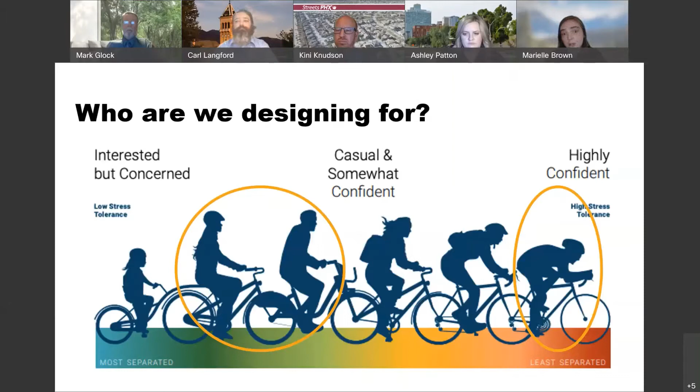To discuss the safety and traffic impacts, I'm going to hand it over to Carl Langford, my colleague.

Thank you, Marielle. One of the things we always look at when we have a 4-lane roadway is the safety aspects. Research shows you can receive a 47% reduction in collisions when you transition a 4-lane roadway—2 lanes one direction, 2 lanes the other—to a 1-1-1 roadway, meaning a center turn lane with single lanes going north and south. Also, one of the benefits from the safety aspects is a reduction in speeding, since the prudent driver often sets the speed for people along the roadway.

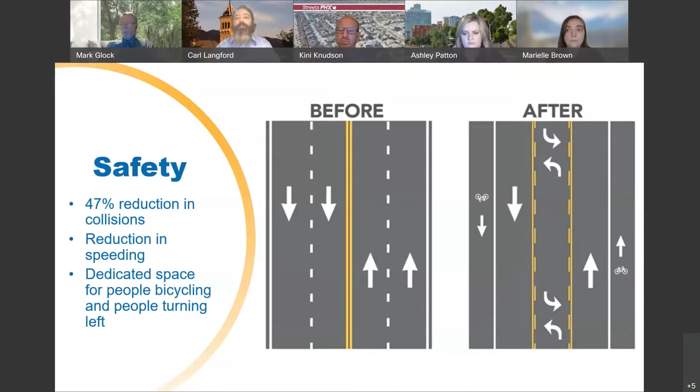So, as the prudent driver often sets that speed for people along the roadway, it also provides dedicated space for people bicycling and for people turning left in the area.

As we talk about safety, I want to talk about 3 specific types of crashes that happen on 4-lane roadways that improve as we transition to a 3-lane roadway. The first one is a rear end collision.

The car in front of you needs to turn left. They put on their blinker. Hopefully you're paying attention and have sight distance to slow down and stop, but oftentimes people aren't, and they rear end the person in front of them. As you transition to a 1-1-1 configuration, that vehicle turning left gets to move into a left turn lane, and traffic can continue past unimpeded.

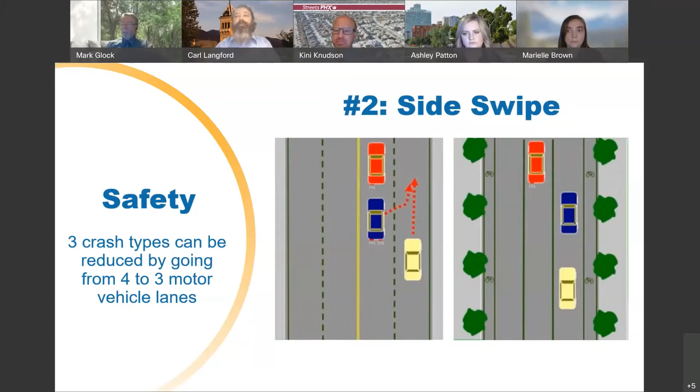The next type of collision is what we call a side swipe. Again, the car in front of you slows down and stops to turn left. Hopefully you're paying attention, but sometimes you're not, and you try to maneuver out of the way without realizing there's a car next to you that you end up side swiping. With a 2-way center turn lane, that left turning vehicle gets out of the path of other vehicles on the roadway.

The last type of collision is left turns. Here you might have 2 vehicles looking to turn left onto driveways near each other, and one car ends up blocking the sight of the other. So a vehicle turns left and causes a collision. Overall, that's why research shows you get nearly a 47% reduction in collisions as you make these changes from a 4-lane roadway to a 3-lane roadway.

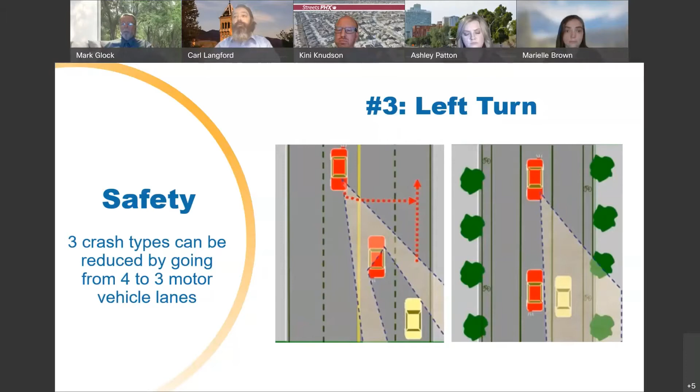So then to talk a little about our traffic analysis: first, you have to go out and collect data. There are 5 intersections throughout this section, so we went out and collected data at each one. The data we collect is turning movement counts—how many cars are going straight, and how many are turning right or left, for all 4 directions of the area.

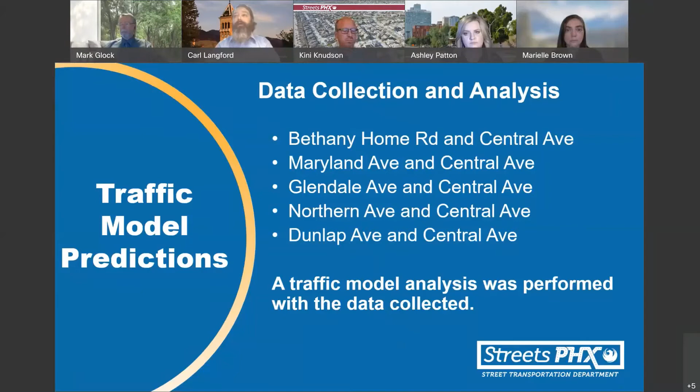Now as we look at the peak in the afternoon time frame—next slide, please—we see again the average of all vehicles that approach the signal. That average ends up between 1 to 8 seconds in this analysis.

But the bigger question is the northbound direction, because that's where we're really reducing the lanes of traffic. In northbound, you can see an added delay of anywhere from 2 to 35 seconds. That 35 seconds happens at the Glendale and Central intersection.

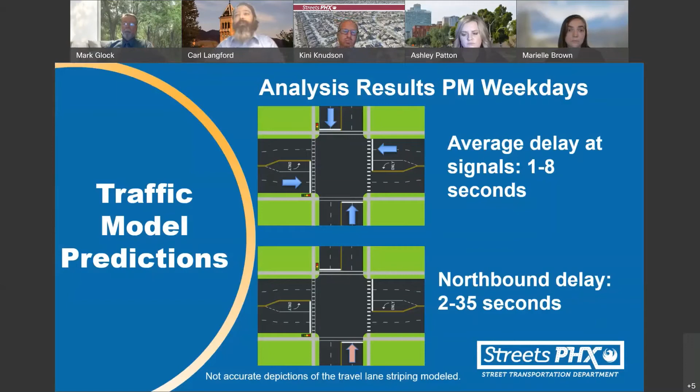Most of the time when we see these types of projects, we do see a reduction in traffic. Research from throughout the country says that reduction typically comes back close to what the traffic was within about a 2-year time frame. So, Marielle, I'll turn it back to you.

Great, thank you, Carl, and thank you for that great presentation and summary of the safety and traffic impact. Just as a summary, before we go to the final poll and then the questions and answers, I want to summarize what we've heard tonight.

There will be some increases and some decreases in the proposed changes. We'll see increased space for turning left and increased space for bicycling, along with increased safety, but also increased traffic delay at busy times of the day, and potentially increased traffic diversion at busy times of the day.

At the same time, we'll see decreased points of conflict. Carl showed the different ways you'll have fewer points of conflict as you drive on the street. We'll also see reduced weaving around left-turning vehicles, because those vehicles will have a lane to sit in.

We'll also see decreased delays behind left-turning vehicles, since they will no longer be in the through lane. And we'll see a reduced risk of collisions and fewer cars driving over the speed limit, as speeders will no longer be able to pass cars driving the speed limit.

So with that, the final question is: thinking back to the priorities you identified at the beginning of this meeting, does the proposed design meet your priorities for Central Avenue? This will work just like the other polls. A question box will pop up in a second—please take the time to tell us how well the proposed design meets your priorities for Central Avenue.

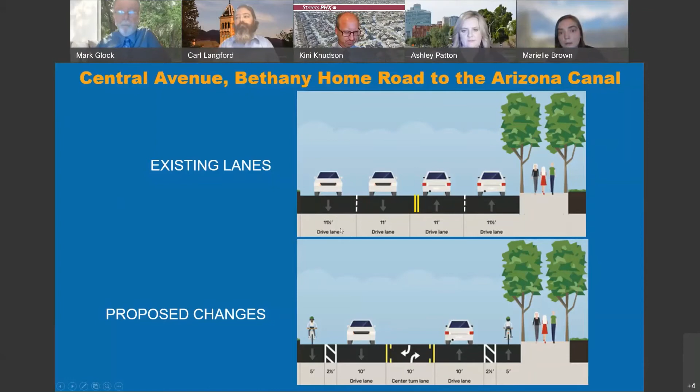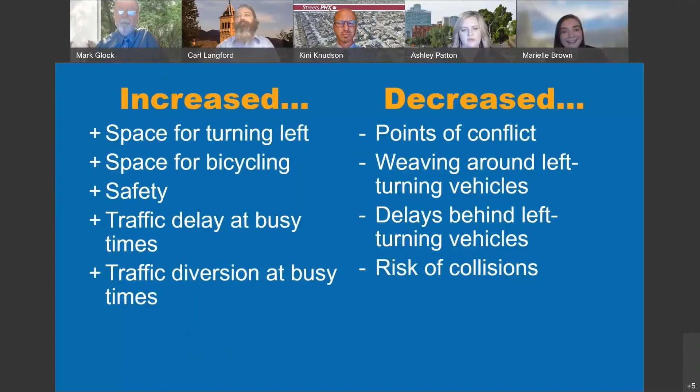Marielle, were you going to answer what I think one of the questions was? Yeah, bike lanes, I had scrolled through to show the buffered bike lanes, but a buffered bike lane is a bike lane with an additional paint buffer. So it's usually about 2.5 feet of extra space, and that provides more space between the people biking and the people driving to provide a little bit of safety for everyone.